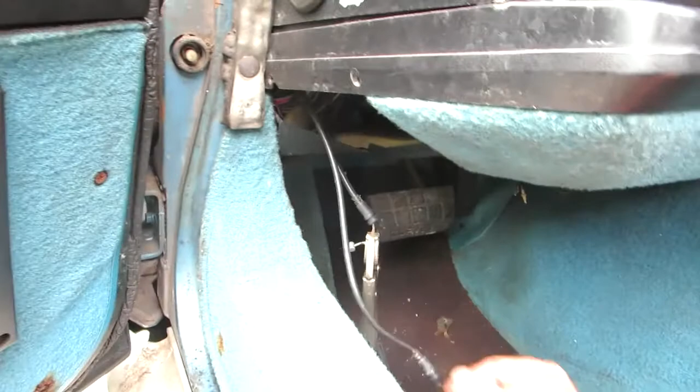First I'll just show you that. There's this little bracket in there - sorry, I took this apart 8 months ago and I'm not doing a play-by-play on it, but this is what you'll have.

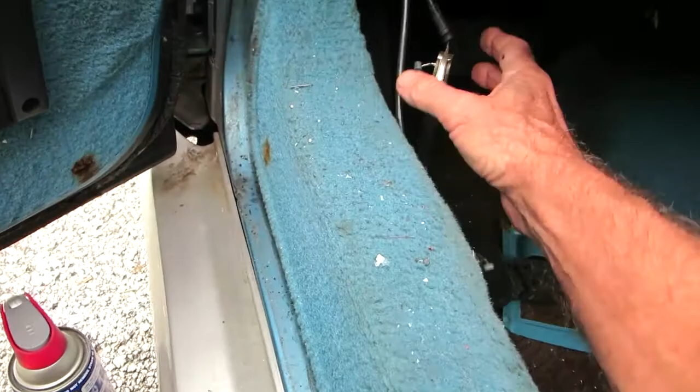The cables are going to go in there. You're going to pull back on this lever and it's going to pull the cables loose. In my case, I've got one popped already. This is how you hook them up to a pair of vice grips and you pull on it and it should release the little hood latch.

That's not the fun part. We're going to do the fun part. Jeez, sorry.

This never ceases to amaze me how freaking low this thing is. I drove a somewhere mid-90s ZR1 once - wow, that was impressive. Don't remember it being this low.

So anyway, why am I coming over here? I'm just going to come over here because this is what I'm going to do. In case you haven't noticed, this one hasn't run in 5 years or so. I'm going to have fun.

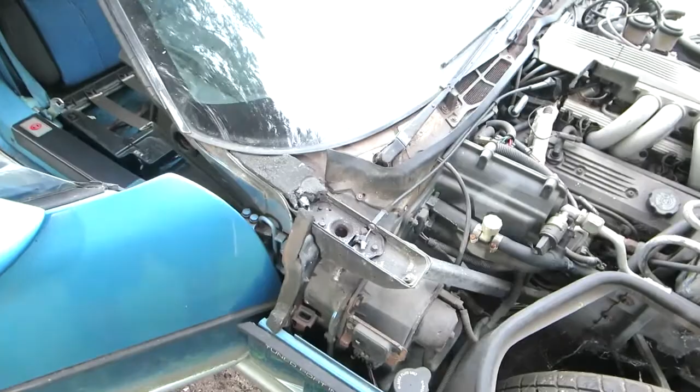So what happened in this case, these cables got stretched out or something, so they put some little crush weights on there to make up for the slack. And then what the cables do is basically pull these latches over.

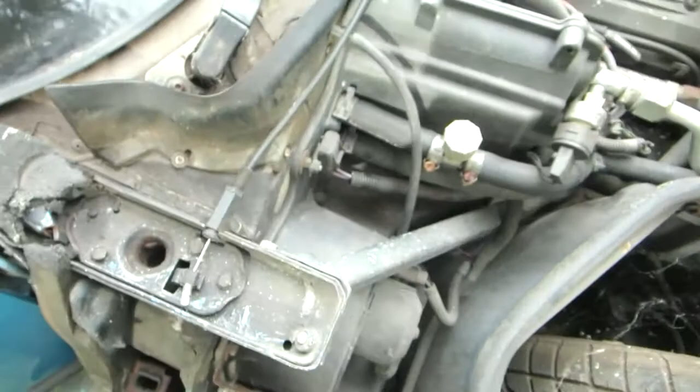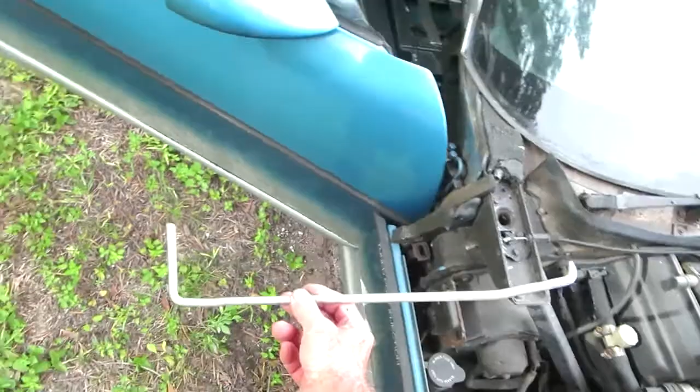If the cables break, I think basically you can take the wheel off, and I think you can take these fender covers out and reach up in there somehow and get in there. But this is the deal - I will put a little diagram at the end of this.

One thing I have not seen anybody do - I've seen there's a Corvette place that shows you how to make, or not how to make them, but they sell them, and I think there's some other videos on there, but I haven't seen anybody actually open their hood with one. So I did it. I haven't practiced this since February, so we're going to do a real world test.

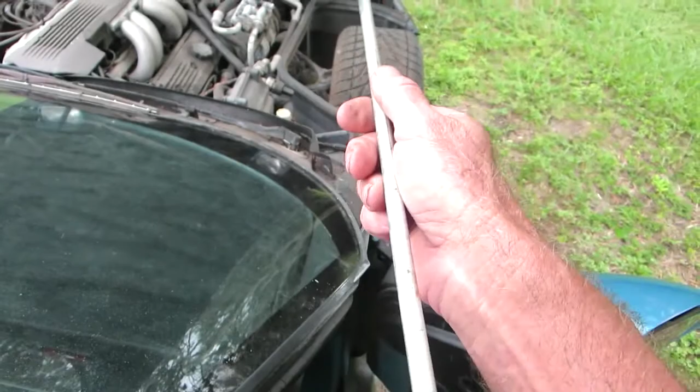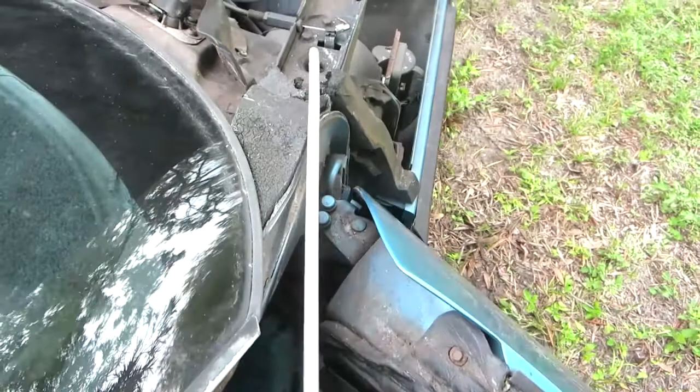I'm only going to unlatch this side, but it'll be the same on both sides, just opposite. What you're going to end up doing is reaching up under here, and you're going to reach in there - which way am I going? That way? Or that way? That way. So we're going to go in and push this thing over like that. You're going to tear this seal up, no doubt, but of course my seals are all crap anyway.

So I'm going to drop this back down and let's see how long it takes me to actually do it. I probably will carry this thing as an emergency tool, but hopefully if you notice that your cables are starting to get worn and it's getting harder and you have to pull farther back or whatever, your best by far best thing to do is just replace the cables.

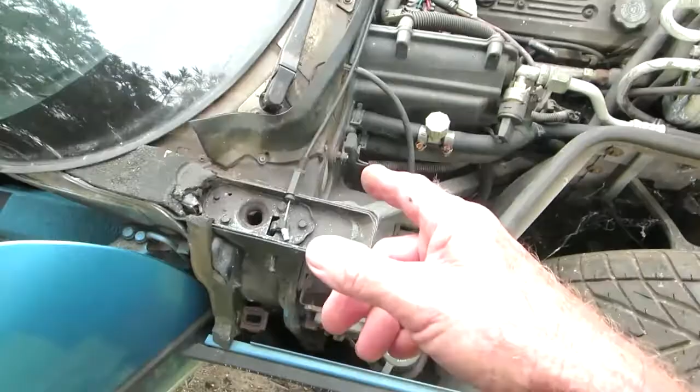I haven't done that yet, but it looks pretty straightforward. They're just right there, which can't be hard to do. Of course, you got to feed them down through under the panel, so we'll show you how to do that too. All right, let me get set up here and we're gonna go for it.

All right, this is gonna be attempt number one. When I say attempt number one, I mean just that, attempt number one. Plus, hopefully you can see what I'm gonna do. The main thing, because I'll probably be in the way.

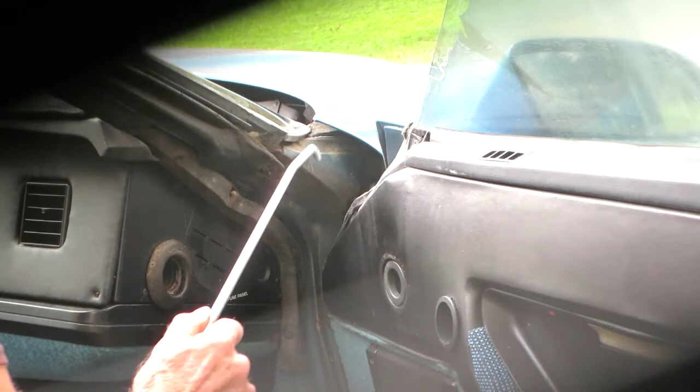All right, so you got this little tool. As I recall, it's got to go up under here. There's a rail running along there you got to get on next to. So let's see, how did I do this? I should have practiced, but chances are you're not going to practice either until you're doing the real thing.

Got it. I put a little mark on here to tell me how far in to go. I'm going to assume it's coming up into there. Wow, I guess I should pay attention to that too. That little notch, there's a little notch in there.

Okay, so turn the prong in that way. You can hear the spring. Okay, so I'm close.

By far the best way is to get a good look at what you're doing first, which I should have done. When I said I've done this before, I'm just going to assume I'll be able to figure it out again. Down the edge of the rail.

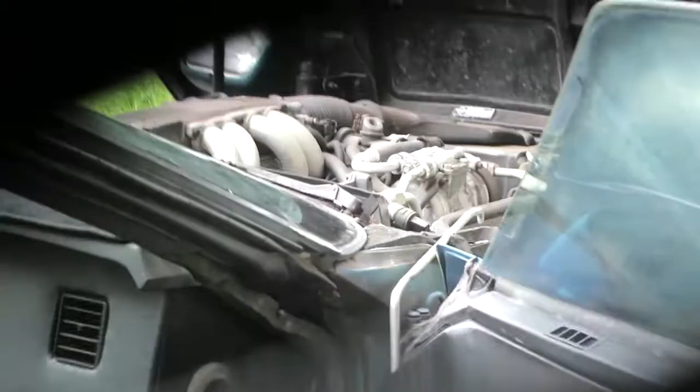Sorry, I'm taking my tripod off. My lens cover's not open all the way, but that's irritating. Sorry, let me try to fix it. Here. Ha! How professional, Howie.

So anyway, this is what you're doing. There's this little notch in here. Little notch in here when you look up through this direction. So you have to point this thing in this direction, and you have to shove it up in here.

I said you're going to rip that seal. It ends up coming in here, and then you turn it this way. It ends up going right along this rail. So you gotta pay attention here.

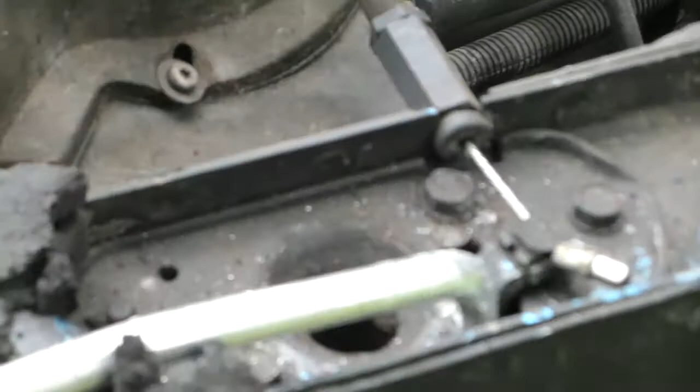Anyway, so focus. That notch, can you see the notch? I'm having a hard time seeing the notch. The notch goes right at the base of the windshield here, and that tells you how far to go. You will feel it drop in there, and you just simply turn it and it pops it open.

Same thing on the other side. If you lost both your cables, if you ignored all the warning signs, your cables are gone, you'd have to tear through this one here.

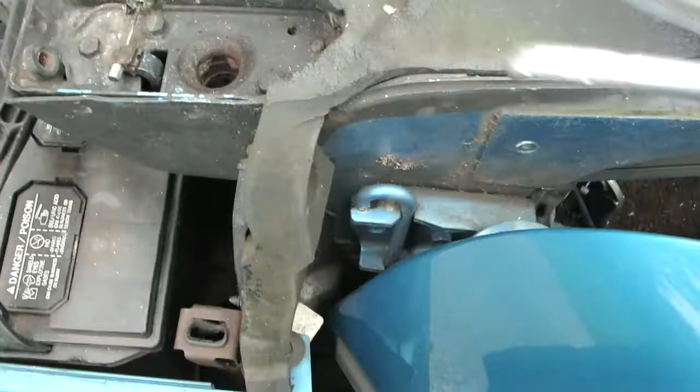Where are you? Man, oh, I'm having a terrible time pointing. Anyway, you got to tear through this one. Same thing, it pops in there. The notch, basically at the base of the trim on the windshield. Turn it that way, and you pop them loose.

Alright, let me go draw up the diagram on this with the dimensions, and that'll be about it.

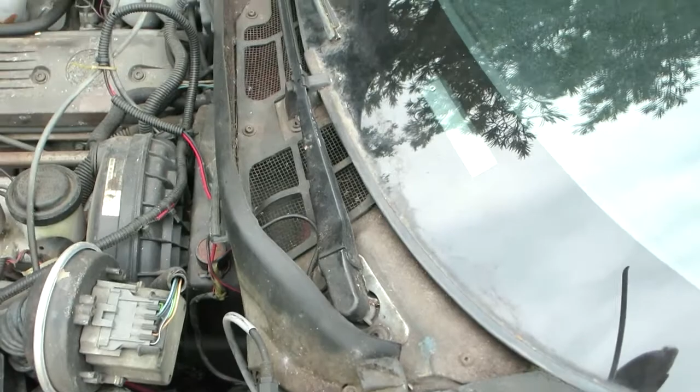Okay, here's my highly professional engineering. Yeah, I know, it looks terrible. Anyway, 17.5 inches long. This little bend thing, here's a kind of a breakdown of the little bend.

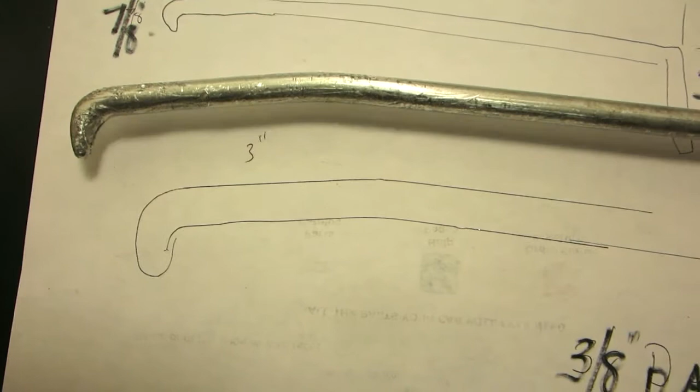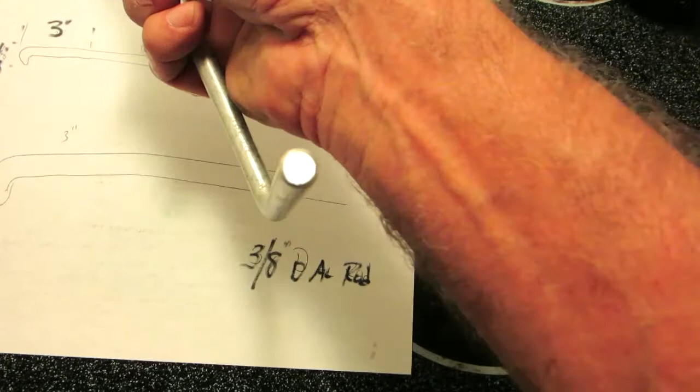It's about 3 inches. You want to drop about that much so when you're reaching in, it reaches down into the hole there. The end's about 3 3/4 inches. I use a 3/8 inch diameter aluminum rod, which I just happen to have. I like to use whatever I happen to have around.

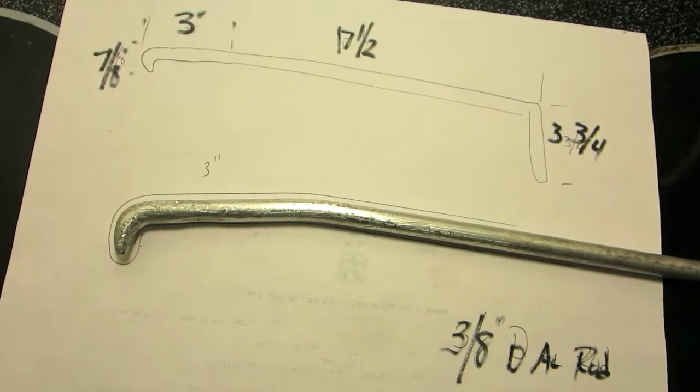Let's say it's 3 3/4 on there. As you can see, I put it on a vertical belt sander and just kept going around until I got it to a relative point-ish. It's got to be small enough to go in that hole, but not so small that it bends. Hopefully it's not something you're going to use a lot, but I could see hanging onto this thing for emergencies.

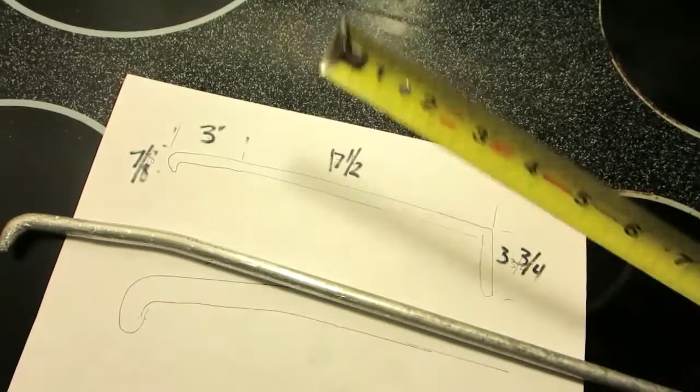One thing I did not put a measurement on yet - there it is, very important. Yeah, there we go again, this one-handed thing. That little cut is, well, it's 4.5 inches from that end.

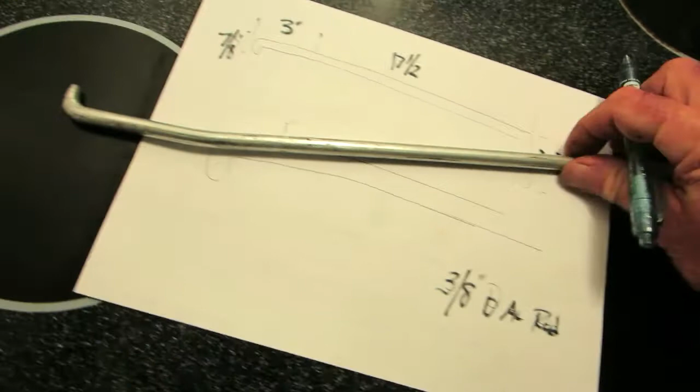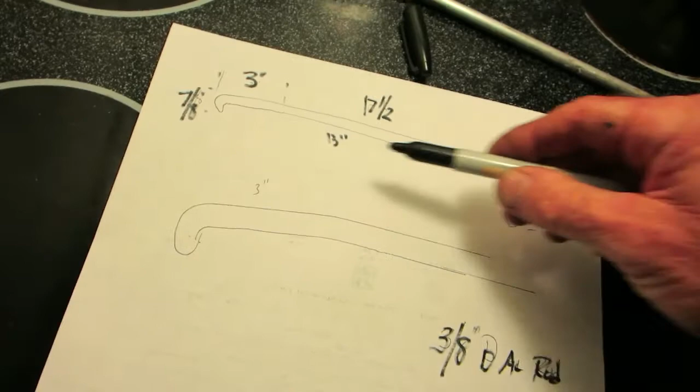More importantly, it's basically 13 inches. So the little cut part, let's say 13 inches. That lines up with the windshield when you're putting it in there, the edge of the trim of the windshield. So that tells you where the hole is, and it's always important to know where the hole is.

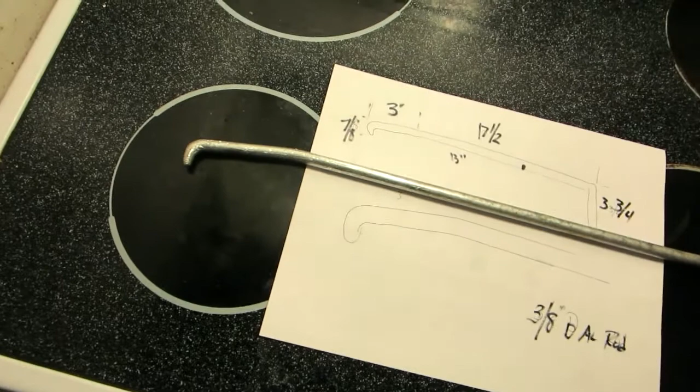Alright, hopefully that's enough information there. Make yourself one of these, throw it in the back somewhere. You never know, maybe you can save one of your Corvette friends out someday. Help them out.

Jeez, you can't talk either. Okay, that's about it. Good luck.